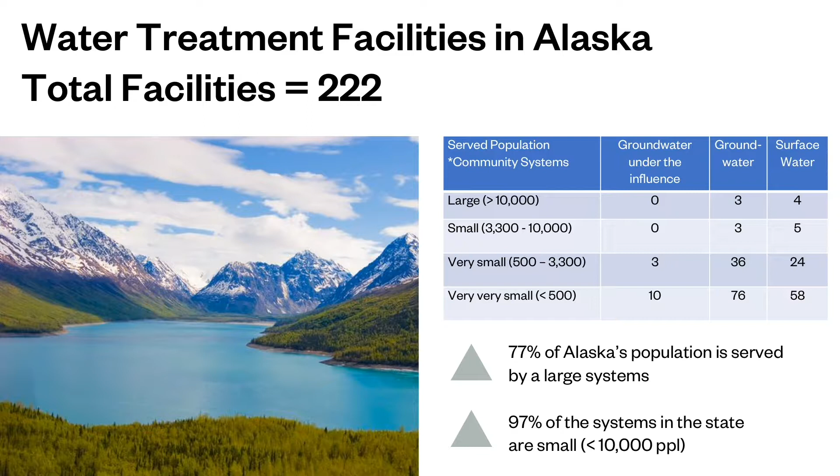In Alaska, where I am from, we have a lot of water and wastewater systems. In particular, this slide shows the water systems that we have. The interesting part about our state is while we have about 500,000 people in the state, the majority of our water systems serve only between 100 and 300 people. Further, these communities that serve 100 to 300 people are very widely distributed and in very cold regions. So with their remoteness and disconnected from the road system and the small size, it makes it quite a challenge and quite expensive to provide water and wastewater service.

So here's an example of a community named Kipnuk. It's out in southwest Alaska. And this community has no running water, no piped sewer. They have a watering point in the middle of town, and they use honey buckets or a 5-gallon bucket as a place to go to the bathroom. All the water that comes into the home is hand carried.

The reason they do not have piped water is because where they live, the ground is unstable. It has intermittent permafrost, as well as is quite soggy in the summer from water. And with that, there's no roads. They have small vehicles, four-wheelers or snow machines that travel on boardwalks through the town. So with that in mind, having plumbing conveying water to and from a home makes it a challenge.

Further, in a community like this, deliveries of goods come either by small aircraft or by seasonal barge, with the ability to only have small shipments or once a year large shipments. Providing the equipment and or materials to have a large water and wastewater system can be a problem.

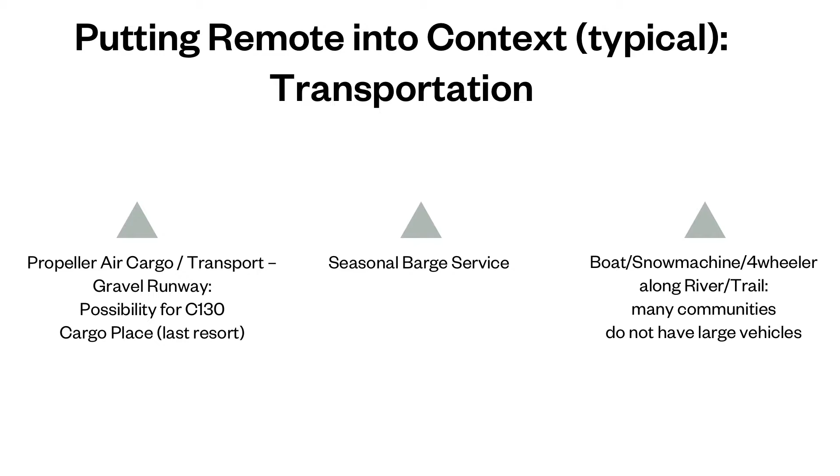Beyond that, in the community, some have small vehicles like four-wheelers and snow machines. A few have large vehicles like a normal sized car. And everyone uses the river system or the ocean when it's not frozen with a boat, or when it's frozen with other means of transportation. So if you can imagine a water and wastewater system that must be operated and maintained by someone that only has something not much more sophisticated than a motorbike, this is the type of system these communities need to have unless they have the capacity to have a larger system.

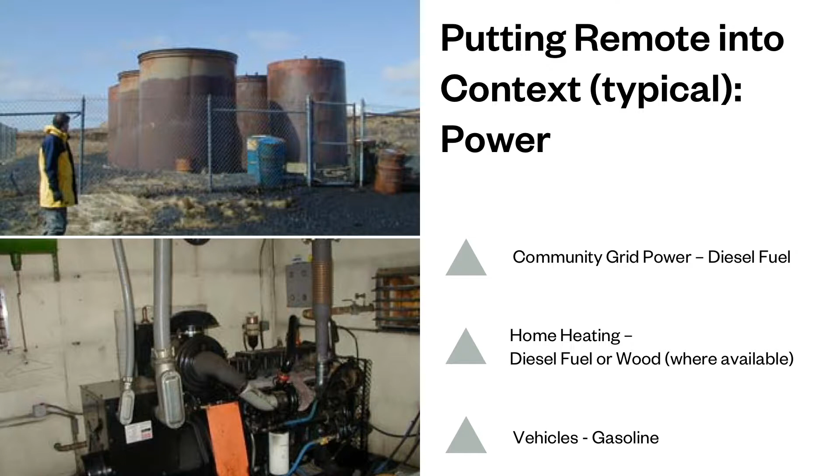So I'm going to share a couple other pieces that make this a challenge. Another piece that makes these rural water systems a challenge is because they're disconnected from the road system, they're regularly disconnected from a large-scale power grid. With that in mind, these communities use diesel fuel for powering the community, creating electricity from a generator, as well as at times have to use either wood or fuel oil to heat their home.

And so now we think about this water system that needs to move water around using pumps and energy, possibly heating the water to keep it from freezing. That takes a lot of diesel fuel. That diesel fuel has to come in on that seasonal barge. So we need to assess the energy load that our water and our wastewater system takes on when it comes to the amount of fuel the community uses.

And as I had mentioned, the soil makes a big difference. When you are in a non-permafrost related location, you can dig in the ground, you can bury your pipe, you can mount your pipe or your structures on top of the ground because your soil is stable. In the case where you have frozen soils or permafrost, this becomes much more complex.

In this picture, we have a number of photos illustrating what frozen soils look like, either as a soil core with an ice lens or failures that have occurred due to ice. Either ice causing the soil surface to slump or ice causing the soil surface to rise.

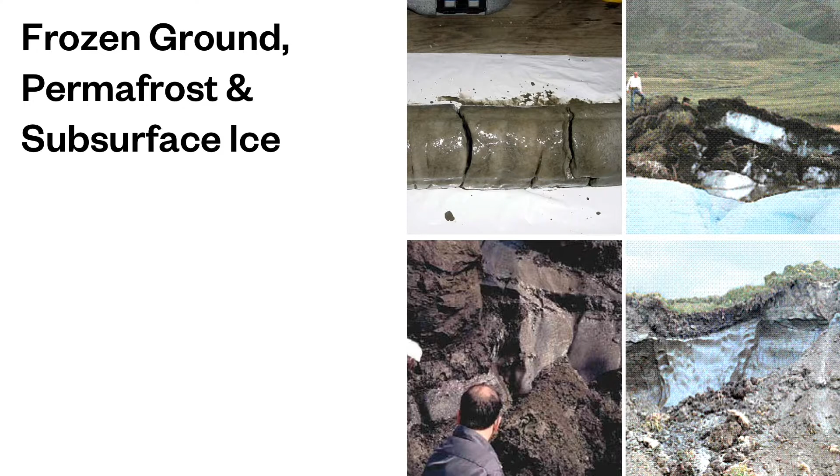And if you think about it from the perspective of these different dynamic situations the ground is causing, this means that if you put infrastructure on the ground in a frozen area, that infrastructure is likely to move, whether it be up or down, and it's likely to move seasonally. So how do you design your system to handle this changing and very dynamic ground situation?

So when we think about what it means to have a water and sewer service, we have to understand how much water is being used. If we have very little access to water, say I have to go get my water from a watering point in town, I'm going to use very little water because I'm not going to want to carry it. In those cases, these self-haul systems, people use between 1 and 5 gallons per person per day.

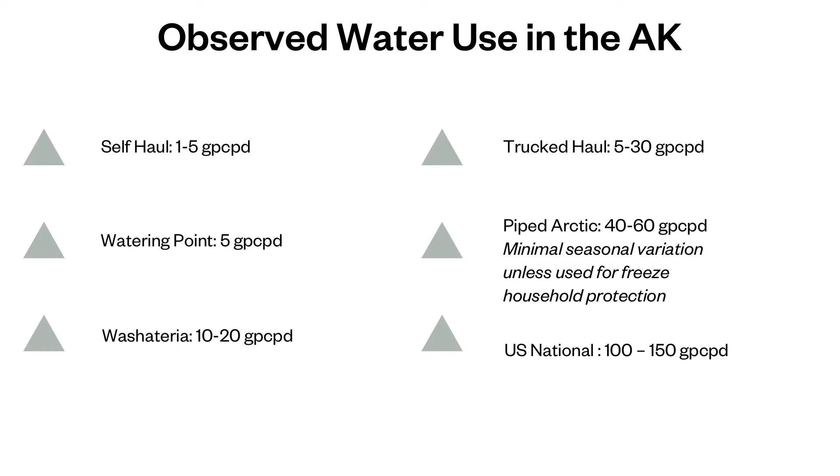And as you increase the type of system or the complexity of the system and their ability to make the water easier and easier to get for a homeowner or make it available in the home, the amount of water used per person per day increases. So as it increases, we gain health benefits. Self-haul, people limit their water use to what is most important to them. That's usually a bit of washing and drinking. As we increase the amount of water available in the home, people tend to do more hygiene practices, creating a more healthy environment.

So what do these practices look like? Here's some images of what self-haul would look like. You can self-haul by going to a local watering point in your community. In rural Alaska, these are called washaterias, where there's a watering point, oftentimes a toilet and a laundry machine, and possibly community showers. So if you go to that watering point, you can use the facilities and bring some water home to your house. But it's still hard to carry. Hopefully you have a snow machine or a four-wheeler to take it home with you.

What could be easier is in the summer when rain is available, you can put buckets under your rooftop and collect rainwater. That means all you have to do is go outside your door to collect the water. That's great. People prefer rainwater over most of the community water because of the natural taste of it.

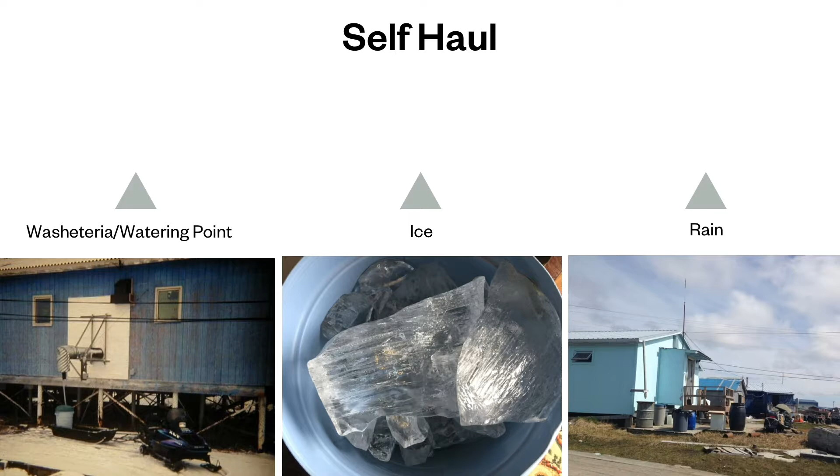Further, while harder to get, ice melt is pretty common in communities in rural Alaska because it's a traditional source of water. So people travel out to a region or a lake or a pond that has some traditional history, and they chip ice out of that lake and bring it home. Again, while heavy, it provides a traditional connection. But you're not going to get hundreds of gallons of water from ice.

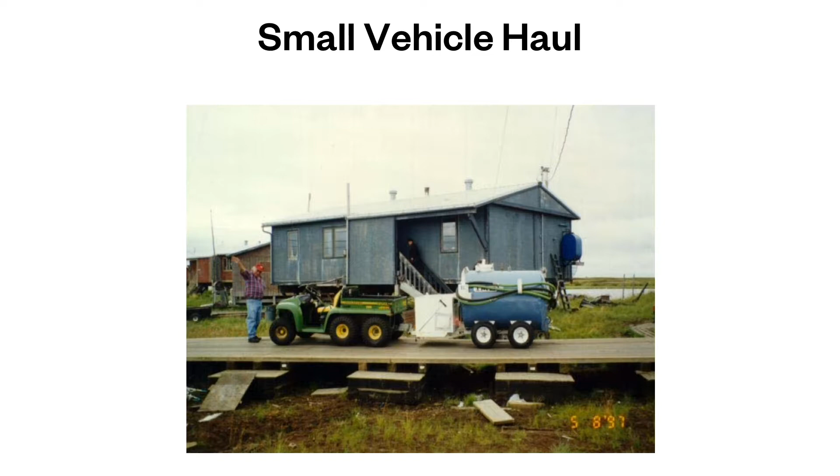As we develop into larger systems, if there's road infrastructure in the community, you can have a small vehicle haul. This would be something like a four-wheeler or a tiny tractor carrying a water tank that would collect water at a watering point, bring it to your home, and deliver it to a small water tank. This makes sure that you have more water at home available for those hygiene needs, and that it's easier for you because you're likely paying for this as a service. The challenge is if there is a snowdrift or access block to your tank, it may get harder and harder to get your water delivered to you.

As we go into a bigger community, we might be able to have a large vehicle haul. This would be a large truck, something that you could see on a normal highway in a larger city. The challenge with this is that while it's possible to have these in a community with adequate road infrastructure, you may have local regulation that says that people driving a vehicle over 1 ton need to have adequate driver's licenses. And in that case, you might have a capacity issue in the community.

In both these self-haul or small vehicle haul or large vehicle haul cases, the vehicle is acting as the conveyance system, kind of a drivable pipe. Similarly to water, wastewater is handled the same way, where you draw water from a tank into a vehicle similar to the ones shown here.

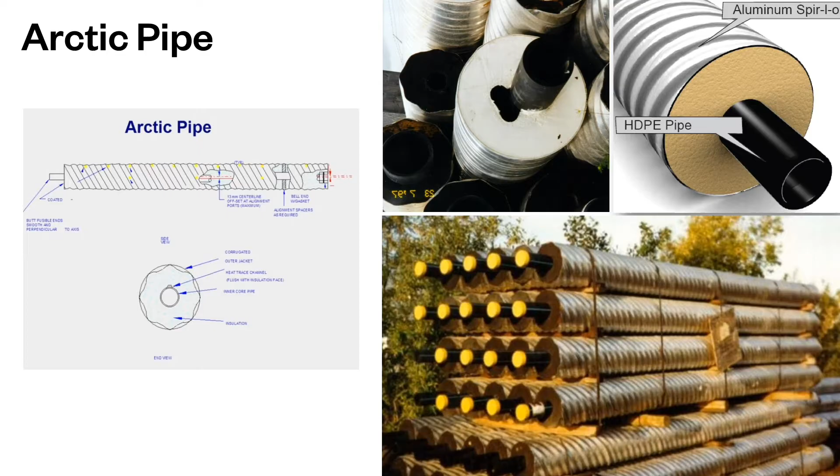In this piece of pipe, we insulate it to keep the warm water or the wet water inside the pipe or sewage wet, and we keep the cold out. In most of the cases, we oftentimes put other types of appurtenances, something like tubes for a glycol heat loop or an electrical heat tape, so that if there was a freeze issue, you could locally thaw that piece of pipe. This type of pipe is quite expensive, but it does work in the Arctic.

So how do we mount this pipe? In a system or a community that has frozen ground, possibly permafrost or discontinuous permafrost, you may decide to mount your pipe above ground. If you mount your pipe above ground, we have to worry about how the pipe hinders foot traffic or car traffic or small vehicle traffic through that community. Further, not only does it hinder vehicle traffic, it hinders people. So when we hinder the people walking around, we need to provide means for access. Here's an example of how we may build a footbridge over a section of pipe.

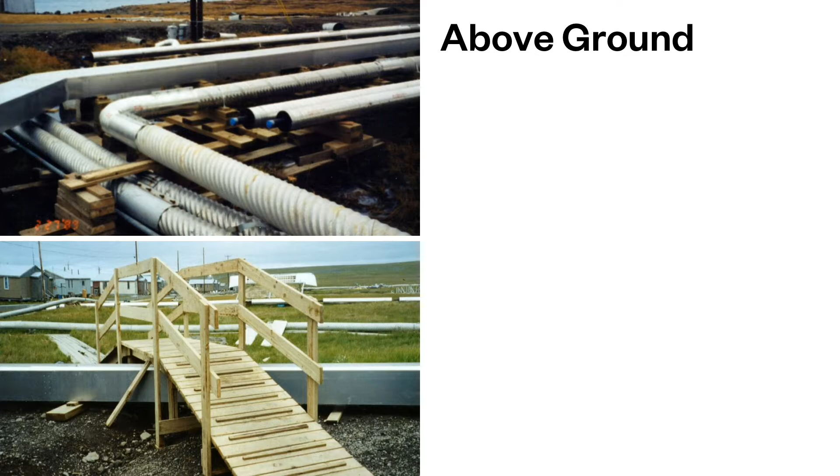Further, the other catch is if you have this jacketed pipe above ground in the summer sun, not only do you have to deal with the pipe being cold in the winter, but that jacket being warm in the summer may mean that the pipe wants to expand. So you need to be careful in the way you design your system to handle flexibility, both in the ground moving as well as the pipe flexing due to thermal gain by the sun.

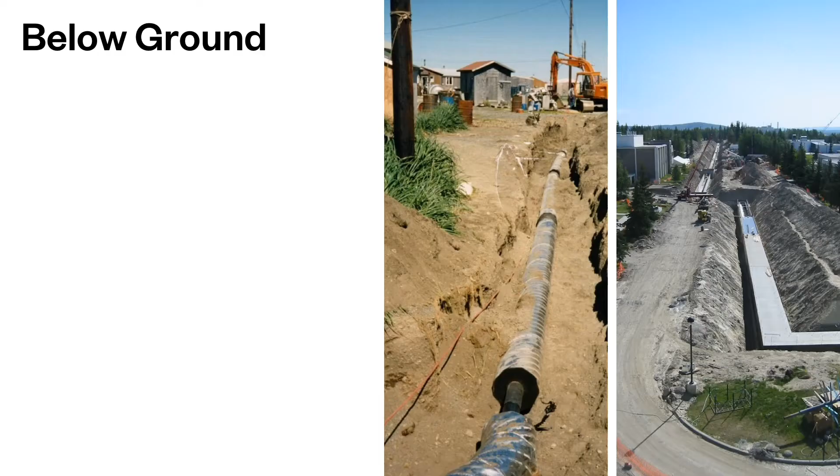If you decide to bury your pipe, we need to be careful at how we bury that pipe in frozen soil. Do we bury that pipe in the active layer, the area of the ground that freezes and thaws every year, or do we bury that pipe in permafrost? If you decide to bury your pipe in permafrost, you must do your construction in the winter so that the ground stays frozen during installation and after. The catch there is you need to make sure that your pipe is insulated adequately to keep the water wet, but not let the heat of the water out into the permafrost, as well as keep the cold from the permafrost from getting to the pipe. So you need to do your math well.

If you decide to bury your pipe in the active layer and it's insulated, you need to understand how that ground movement may affect your pipe. This is more a problem in sewage pipes when you have to think about gravity systems, and if your pipe changes and goes uphill due to ground motion, that the sewage can still get from point A to point B.

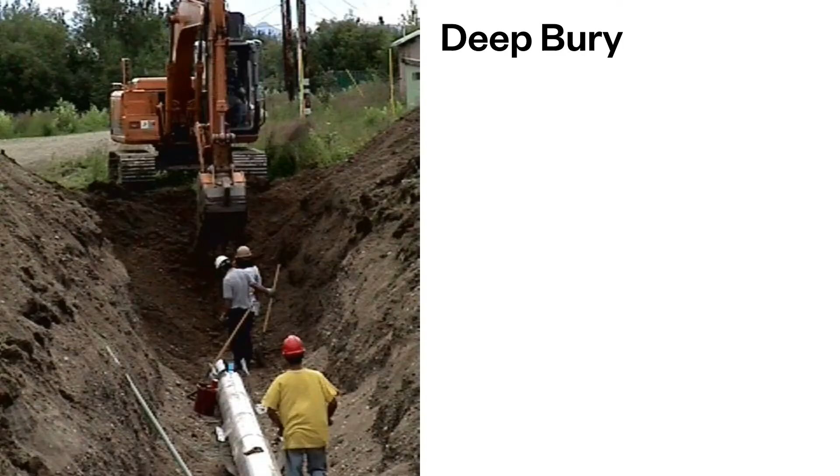If you decide to bury it below the active layer, this is when you bury it below the frost depth in most places. In the Arctic, that may be very, very deep. In Anchorage, which is subarctic, we have to bury our pipe about 12 feet underground, or about 3 to 3.5 meters deep, so that we can make sure that that pipe is in thawed ground and it is unlikely to freeze. This makes it a challenge for breaks and winter repairs.

If you do have a leak that you identify in the winter, digging through 12 feet of earth to get to your pipe is quite challenging. So if you decide to bury your pipe deep, you need to look at how much infrastructure, be it a backhoe or a steam truck or a vacuum truck, you need in the community to be able to do repairs year-round.

Now that we know that we have pipe that we can either put above ground or below ground, another form of freeze protection is recirculation, or keeping the water moving. Here's an example of a fast main distribution system which uses pitot orifices. In this instance, at the water treatment plant, you pump the water out into the main line. The water leaves and goes into a main loop around the community. That main loop is traveling at about 5 feet per second, and it provides the motion in the water so it doesn't freeze.

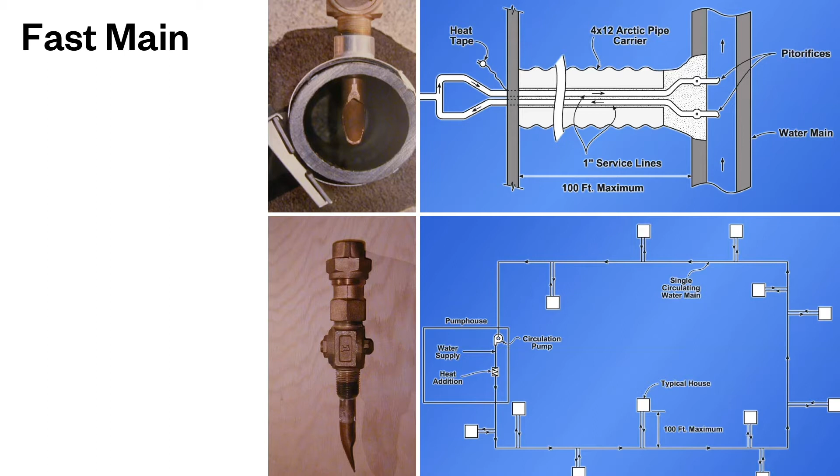Once it reaches a home, similar to the main, you need to recirculate the water in and out of the home service line. So in this case, with a pitot orifice, this pitot orifice scoops the water into the service line, it goes through the home, and then it goes back out into the distribution system. In this instance, we use a large pump in the water treatment plant, which the municipality owns, and all the energy of this system gets covered by that one large pump. A more modern system is a slow main system where we distribute the energy usage.

In this example, we don't have to pump the water as fast in the main. We only pump the water between 1 and 3 feet per second. And then now when it reaches a home, instead of being scooped up by a pitot orifice, we use a small pump, a recirculator pump that is often used in water boilers for home heating, to draw the water out of the pipe, recirculate it through the service line, and return it to the main.

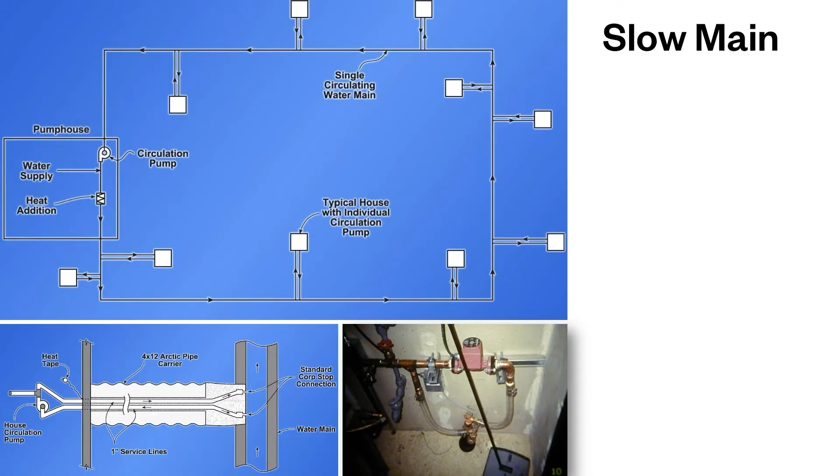In this instance, the municipality has less of an energy footprint for their pump, but the homeowner has a small energy footprint of their own to keep their own service line in operation.

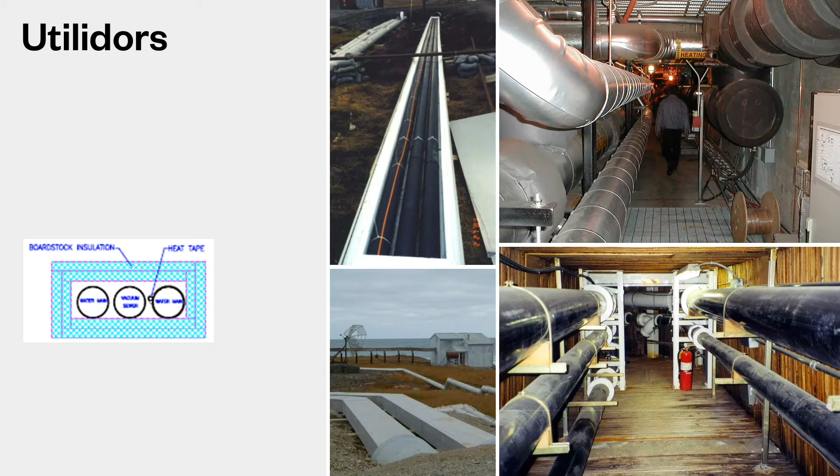If we decide that we need to think about how do we group our utilities together to gain benefit from the wastewater being warm to keep the water thawed or warm, we may use something like a utilidor. A utilidor is like a large hallway that's built, either a box or even as big as a hallway you could walk in, where we mount all of our pipes. This is an access way where we mount the water, the sewer, possibly a district heating system.

And in this instance, all of this infrastructure shares its heat load to keep the water wet in the drinking water, keep the sewage from freezing, and again, to provide possibly district heat. These are great because they keep all the utilities together, but they're also a challenge because, again, it's a large piece of concrete or infrastructure that has to flow through the city.

If you do have a utilidor system, you need to consider how that utilidor keeps its heat inside the utilidor. If that utilidor is too hot, it may thaw the ground, and that thawed ground may cause a safety hazard in your community. So use the heat wisely, use it to keep it warm, but not release the heat into the environment.

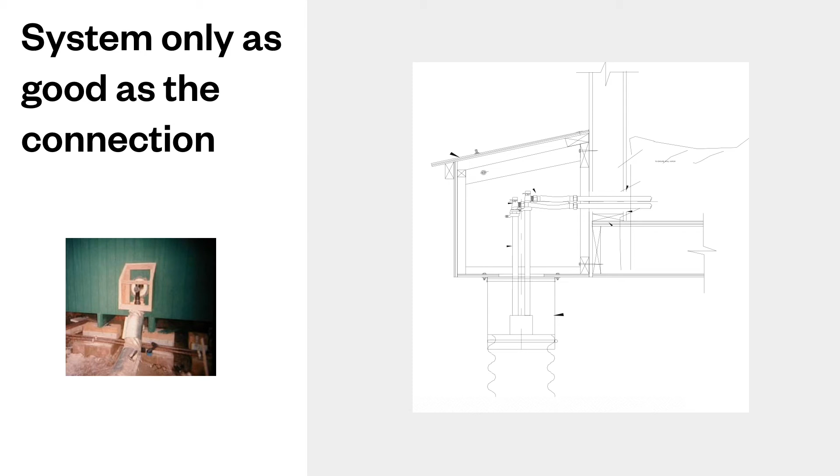And now we've gone to different alternative designs to help that box stay on your house better during this movement that is caused through winter freeze thaw. So understand that connection. If it separates from the house, we need to keep insulation in that connection.

Further, now that we move a little bit out of the piping realm and move into the tank realm, if we have a tank that holds our water in the community, we want to make sure that tank makes our water available for people in high demand at times, as well as for firefighting. The challenge is if we have a large tank of water that's located above ground, in the elements in the winter, it becomes quite cold. We heat that tank or we recirculate that tank to maintain a water temperature above freezing.

If the water is above freezing, that means there's heat from the water that is going to escape, and it might escape into the ground. If that ground is frozen or if that tank is mounted near permafrost, we may need to analyze how the heat is distributed from the tank into the ground to keep the ground from failing and make sure our tank stays intact.

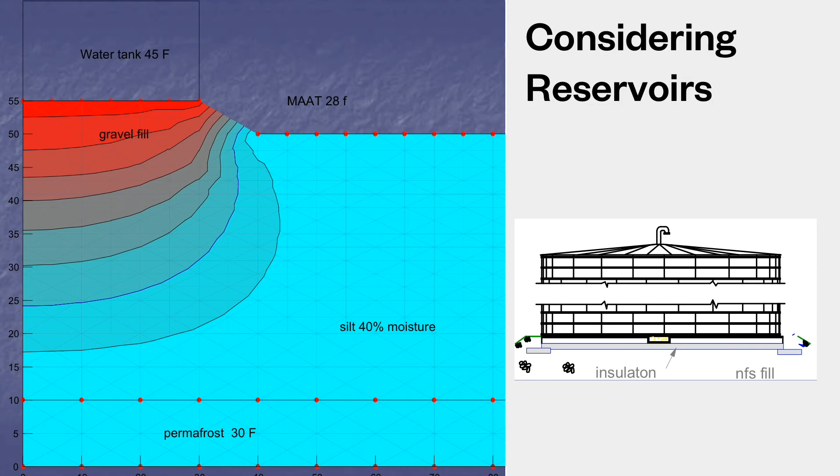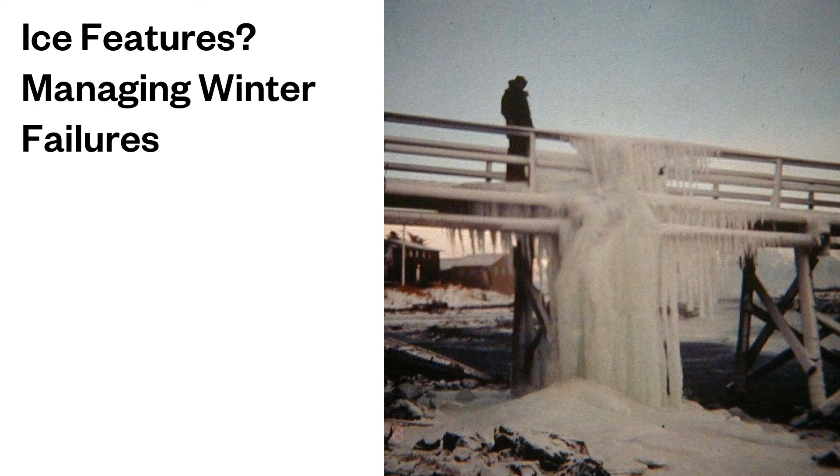So make sure that when a system is designed in a community that we have the tools not only to install it, but to handle failures when they occur, especially the coldest day of the year.